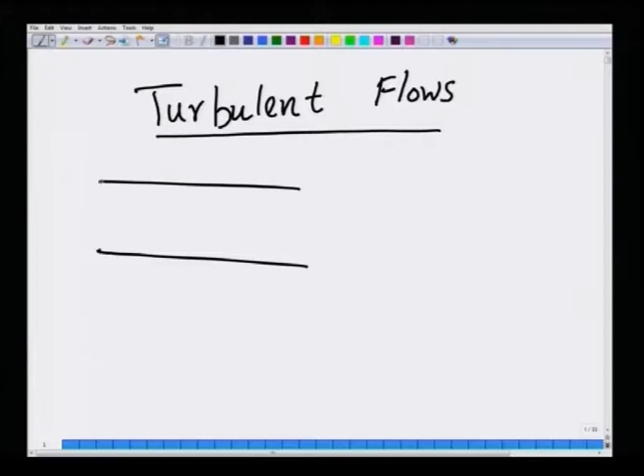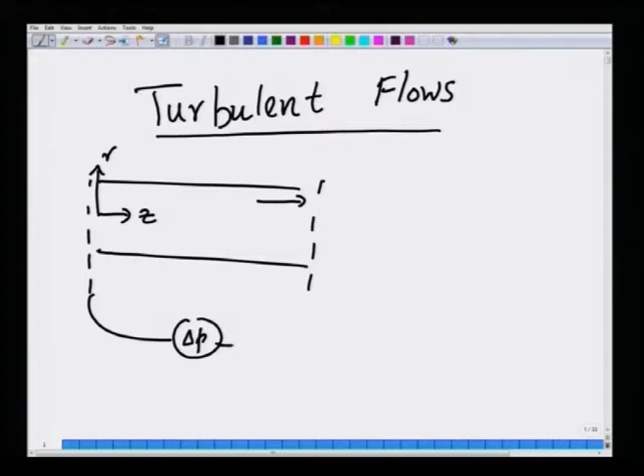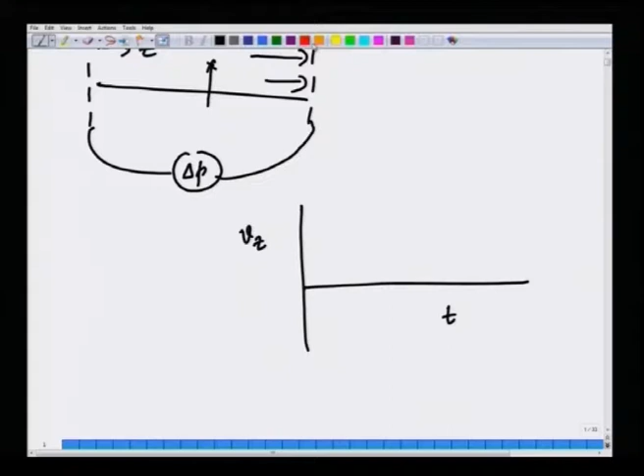We discussed in lecture 38 that turbulent flows are characterized by a large amount of fluctuations about the mean. Consider flow in a pipe, with z as the flow direction and r as the radial direction normal to the flow. While there will be mean flow if you apply a pressure drop between the ends of the pipe, there will also be a large amount of fluctuations about this mean flow. If you measure the z velocity as a function of time using a probe at a given point in the pipe, you will find a large amount of fluctuations.

About the mean, this is the z component of the velocity. On the other hand, if you measure the r component, there will again be fluctuations, but they will fluctuate about zero because there is no net flow in the r direction. The pressure gradient is only along the z direction, therefore there will be flow only along the z direction.

The fluctuations present in a turbulent flow play a very key role in determining the stresses present in the flow. We decided it is better to restrict ourselves to predicting mean quantities, such as time-averaged velocities, because from an engineering and practical perspective, what we want is actually average quantities such as friction factor, volumetric flow rate, or pressure drop. So it makes sense to restrict ourselves to predicting only the mean rather than the fluctuations.

But as we saw in the last lecture, and as I will reiterate, the fluctuations do play an indirect role even in determining the mean. The way that happens is like this.

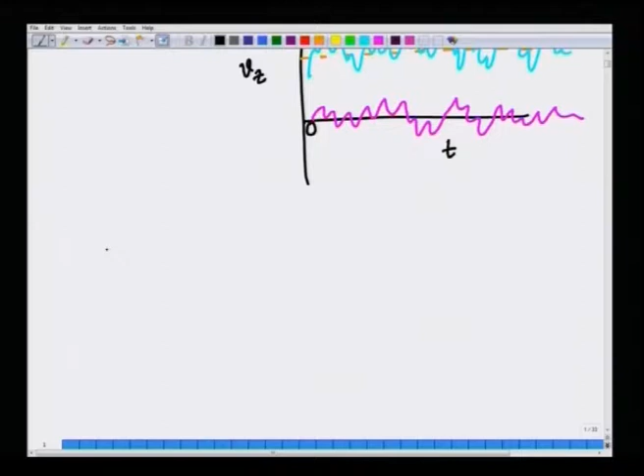You write the total velocity as a mean plus fluctuations, with fluctuations denoted by prime. The mean velocity is defined as 1 over 2T, in the limit T tending to infinity, times the integral from t minus T to t plus T of Vz of t prime dt prime.

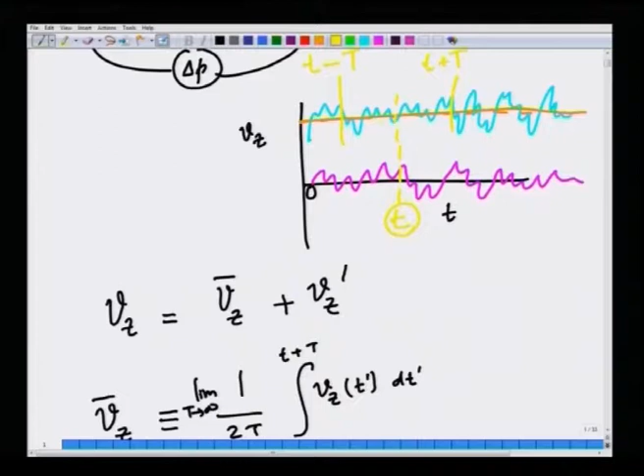What we are essentially saying is: suppose you look at this velocity profile, the actual velocity data. We take some time T, and integrate the velocity fluctuations in the region between minus T and plus T, that is t minus T to t plus T, and divide by 2T.

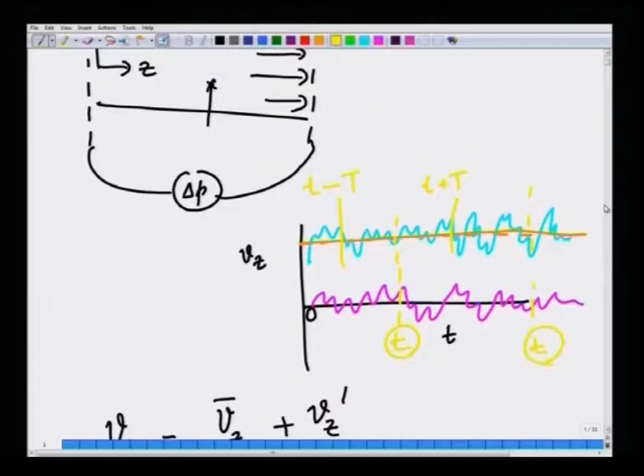Now if the flow is steady in the mean, that is if the flow is stationary, that implies Vz bar itself is independent of time. This means you could imagine doing this averaging by shifting t to some other value, doing the integral from t minus capital T to t plus capital T, and the averages thus computed will be independent of where you choose t to be. That is the meaning of stationary flows, or steady in the mean flows.

So what we did was to substitute this split: Vz as a function of x, y, z, time equals Vz bar, which is already time-averaged so it is a function only of x, y, z, plus Vz prime, which is a function of x, y, z, and time, back into the Navier-Stokes equation. And we averaged the entire Navier-Stokes equation.

While doing so, we neglected quantities like Vy prime times dVx bar by dy, averaged. This would essentially be the average of Vy prime times dVx bar by dy. Although this is non-zero, the average of a fluctuating quantity is zero. So such quantities, which occur linearly in fluctuating quantities when substituting this expansion of total flow as mean plus fluctuations back into the Navier-Stokes equation, are neglected.

You will encounter quantities like this, and those are 0, but we will also encounter quantities such as the average of the product of two fluctuations, and this is not 0. The average of the product of two fluctuations is not equal to the product of their averages, because these two quantities could be correlated in time. So when you integrate over a particular extent of time, they could in general be non-zero, even though the individual values could be 0, because if they are positively correlated, the integral could be non-zero. That is the main reason why fluctuations play a role even in determining the mean turbulent flow.

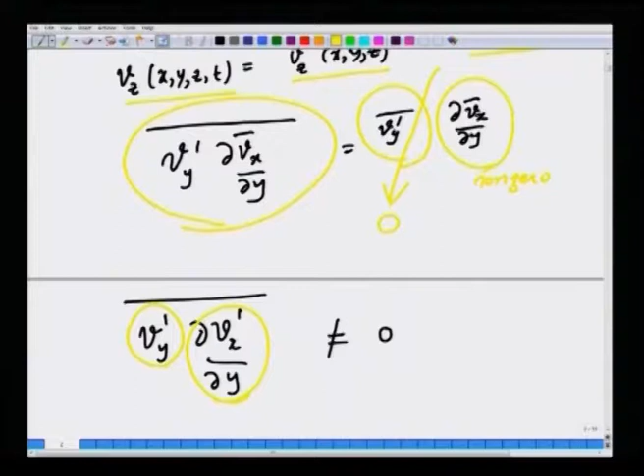So, after substituting all this and time averaging, we finally ended up with this expression: rho times Vx dVx dx plus Vy dVx dy. This is the most general expression, and we are going to simplify this a little later for specific cases. This is equal to minus partial p by partial x, plus partial tau xx bar by partial x, plus partial tau yx bar by partial y, plus partial tau zx bar by partial z. If you merely put bars in the Navier-Stokes equation, the steady Navier-Stokes equation, you will just get this, but the fluctuations play a role because there are additional quantities.

Minus d dx of rho Vx prime Vx prime bar, minus d dy of rho Vy prime Vx prime bar, minus d dz of rho Vz prime Vx prime. Now these three can be included back into the derivative: minus partial p bar by partial x, plus partial by partial x of tau xx bar minus rho Vx prime Vx prime, plus partial by partial y of tau yx bar minus rho Vy prime Vx prime, plus partial by partial z of tau zx bar minus rho Vz prime Vx prime, whole bar.

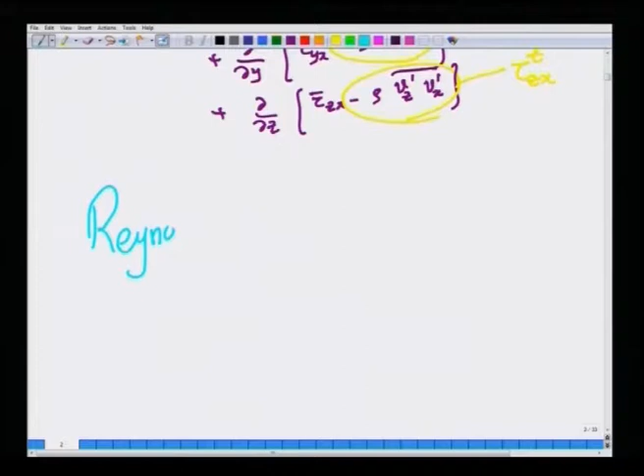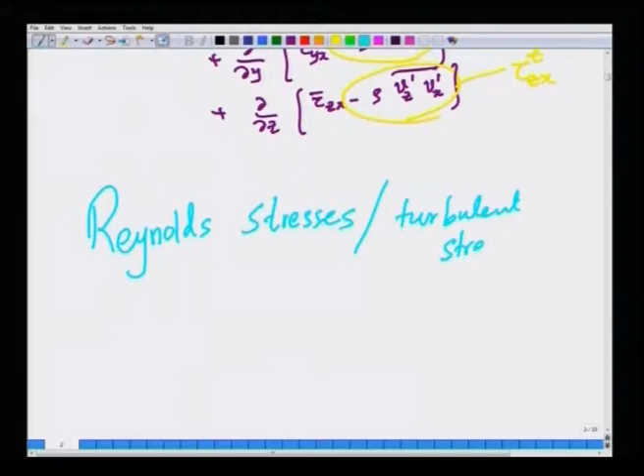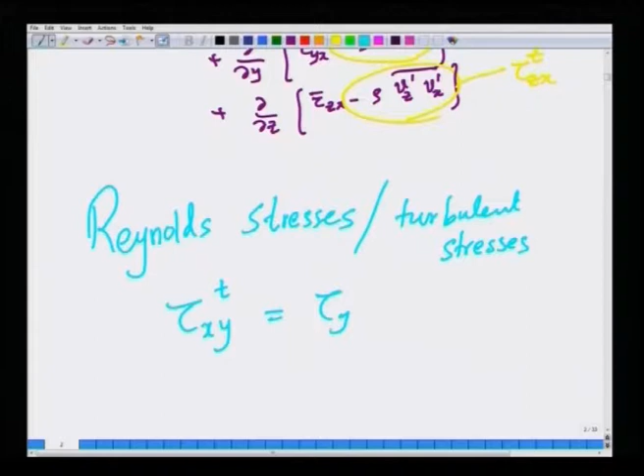Now, these are termed Reynolds stresses because they appear as stresses in the same way the viscous stresses appear, as divergence of the viscous stress. These are called turbulent stresses or Reynolds stresses. So this is denoted as tau xx turbulent, this is tau yx turbulent, and this is tau zx turbulent. They are also denoted as tau xy turbulent and so on. They are symmetric tensors, so tau xy equals tau yx, but their origin lies purely in the fluctuating motion present in a turbulent flow.

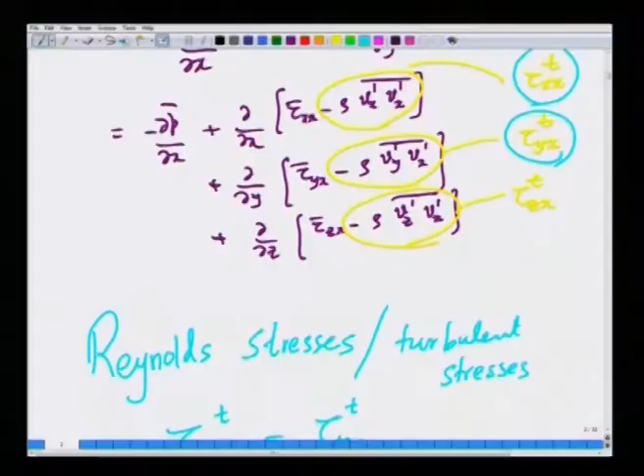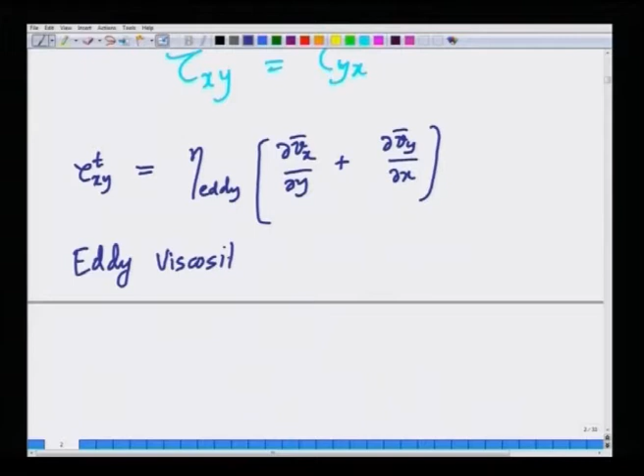So, one option is to write the turbulent stress in terms of a viscosity called eddy viscosity times the mean velocity gradients, just as we wrote for the viscous stress. This is called the eddy viscosity hypothesis. This is not a rigorous relation, this is merely a hypothesis.

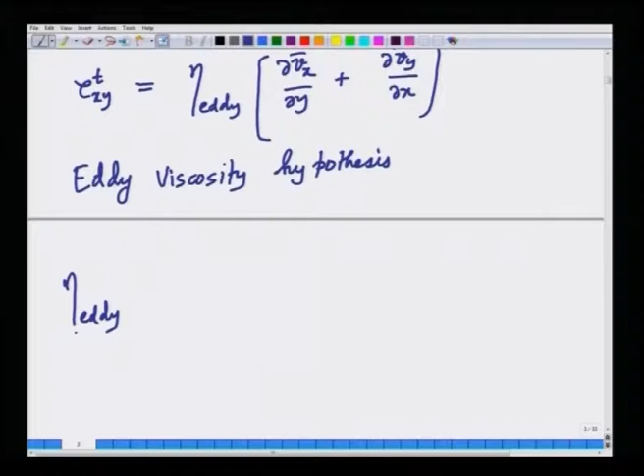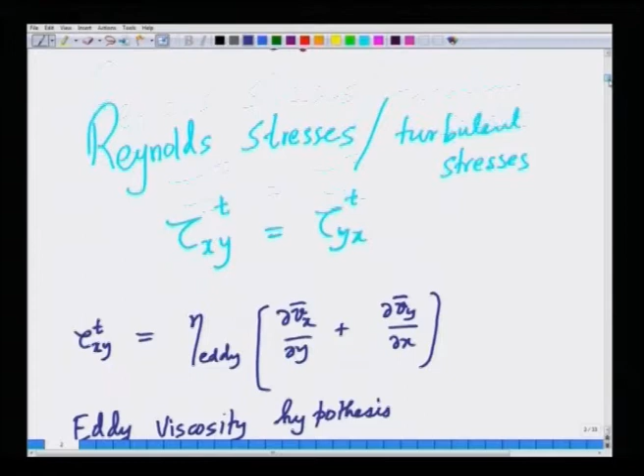Now, if the eddy viscosity, which has the same dimensions as the normal viscosity, is a constant, then it is a trivial addition, because it changes nothing. It is almost like increasing the effective viscosity by eta plus eta eddy, so it becomes another viscosity. We are merely changing the character of the fluid by increasing its viscosity by a tiny amount. But this is not what is happening in reality, because eddy viscosity is not a constant.

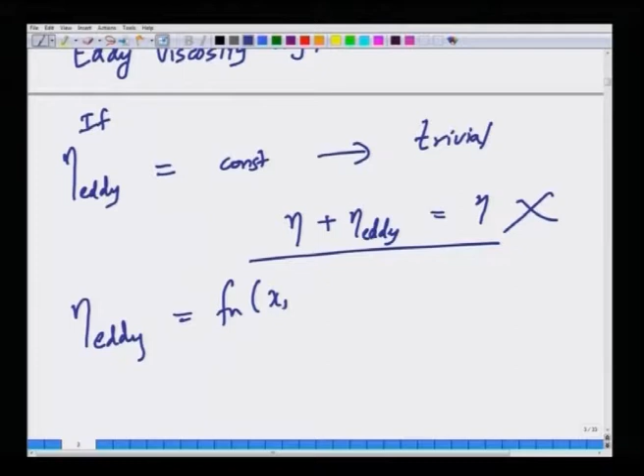It is a function of spatial position in general. For the simple reason that if you consider turbulent flow past a solid surface, like turbulent flow in a pipe, near the wall the velocities are 0 by the no-slip and no-penetration conditions. So near the wall, the velocity fluctuations are small compared to the bulk of the flow, meaning the magnitude of fluctuations is small there. Hence the turbulent stresses will be small, and since we are modeling turbulent stress in terms of mean velocity gradients, the eddy viscosity must somehow be small to keep the turbulent stresses small close to the solid surface.

That physical aspect has to be built into the model by saying that eddy viscosity is not a constant, but instead it is a function of spatial position.

So in some sense, what we are trying to do in this type of hypothesis or modeling is that our ignorance about the way turbulence transports momentum is buried in this single parameter. One can ask whether a single parameter, well, it is not a single constant but a function, can alone describe all the complexities of turbulence.

That is a fair criticism, but nonetheless for engineering applications we will show that eddy viscosity proves a very reasonable tool to predict, for example, the friction factor versus Reynolds number relation in the turbulent regime. With some suitable physically motivated approximations and some experimental input, we will show a little later how we predict using this model.

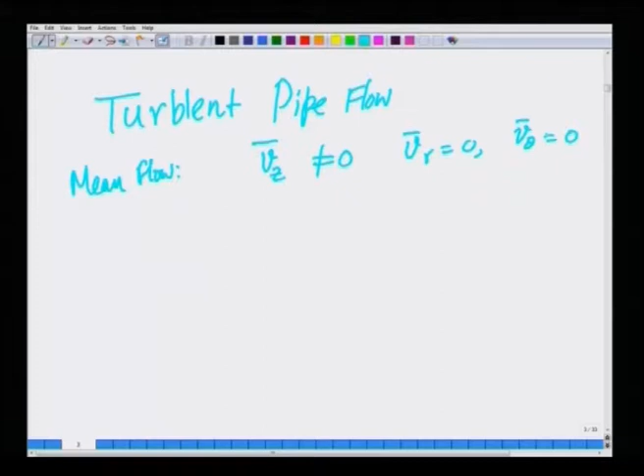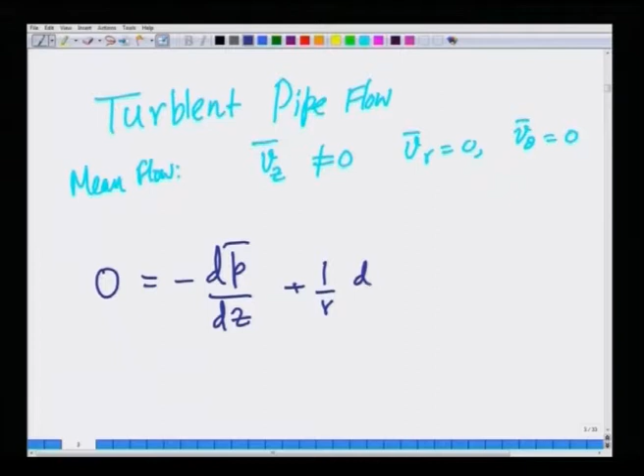Now, of course, turbulent flow in a pipe must be addressed in cylindrical coordinates, so I will switch to cylindrical coordinates. The mean flow will satisfy, there is only one mean flow V z, so V r is 0 and V theta is 0, and many terms will drop out. So the mean flow z momentum equation is plus 1 over r, d/dr of r d tau rz by dr.

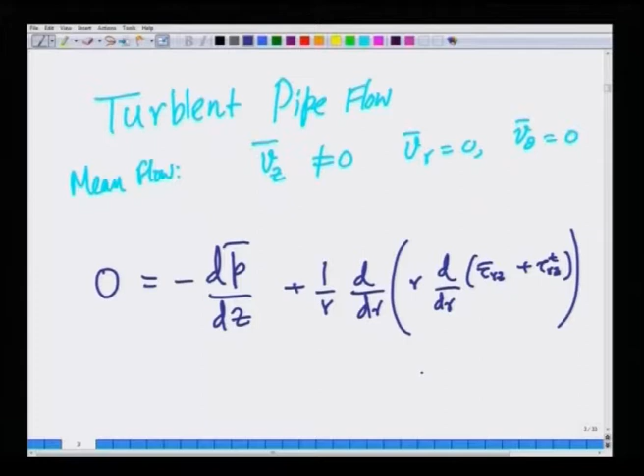But we also have not just this, we also have the turbulent contribution. So let us write this as: there are both the mean viscous contribution plus the turbulent contribution. So in some sense we can rewrite this very simply to yield tau rz plus tau rz turbulent.

This is equal to dp/dz. And then we take r here and integrate, you will get tau rz plus tau rz turbulent equals dp/dz times r squared by 2. So this is d/dr of r, and you will have an r after integration, plus some constant. So tau rz bar plus tau rz turbulent is dp/dz times r/2 plus C1/r.

Now we can readily say that as r goes to 0 at the center of the pipe, the stresses will be finite, so C1 has to go to 0. So we can say very easily that tau rz plus tau rz turbulent is r/2 times dp/dz.

Now if we do a macroscopic momentum balance, take a tiny section of the pipe delta z and do a macroscopic momentum balance, the forces here are the pressure forces on this side and this side. If you take this as the control volume, on the surface you will have viscous forces which will retard the fluid in the minus z direction.

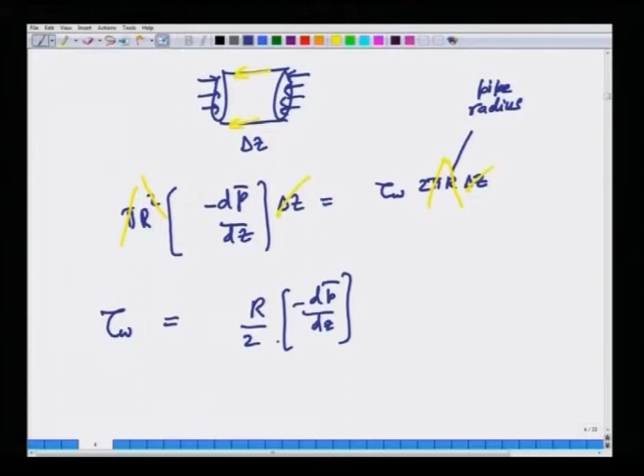So we substitute instead of dp/dz. This implies minus dp/dz is 2 tau w by r. We substitute this term out to get tau rz plus tau rz turbulent is minus r by R times tau w, because that is what it is. You have plus dp/dz here and minus dp/dz there, so if you substitute in terms of tau w, the wall shear stress, you will get simply minus r, the factors of 2 will go away.

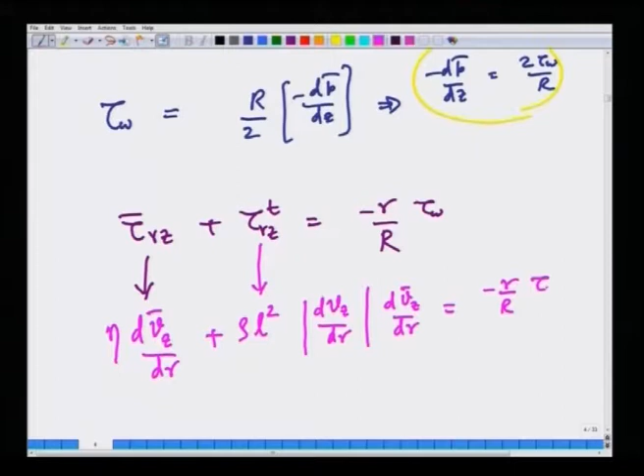Now we know what tau rz is: eta times dVz/dr, and we know what the turbulent stress in the rz direction is from the mixing length model: it is rho L squared times dVz/dr times dVz/dr. This is equal to minus r by R times tau w, the wall shear stress exerted by the wall on the fluid.

Now, so you have a pipe, the axis is along the center of the pipe. We said that r is along this direction, z is along this direction. Now I am going to define y from the wall towards the center. So trivially, capital R minus small r is equal to y. This implies dy is minus dr. So once I use this, I can convert this entire equation in terms of y.

Which I will do very quickly. So you will have rho L squared times dVz/dy whole squared, plus eta dVz/dy, minus 1 minus y by R times tau w, is 0.

Notice that y is going like this and the velocity profile will be like this. So, dv z dy is a quantity that is positive, and that has been taken into account in R. So, the mod is not required anymore, because dv z dy is positive.

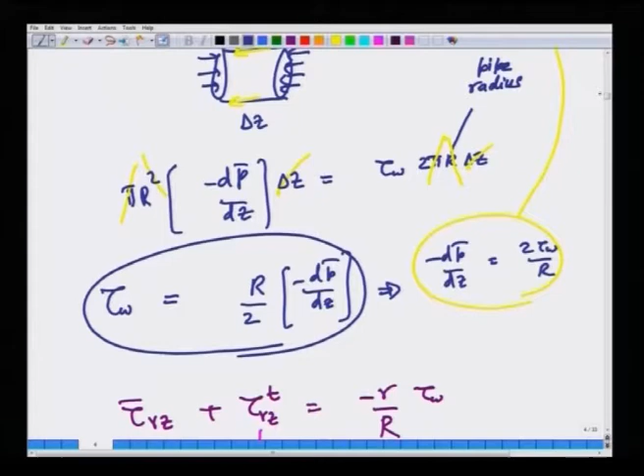But we know what is tau w in terms of the macroscopic momentum balance. Tau w is r by 2 delta p by L. That is something that we just derived using a macroscopic momentum balance here. So in this expression, instead of dp dz, I am going to write minus delta p by L.

Delta p is nothing but p inlet minus p outlet, that is the definition of delta p. So u star therefore becomes square root of r by 2 delta p by L times 1 over rho within the square root.

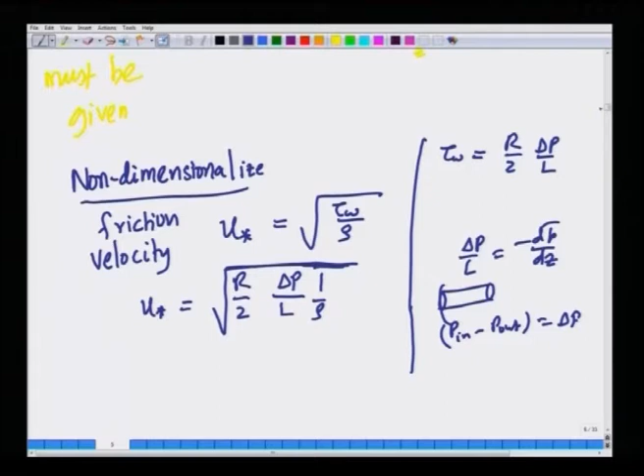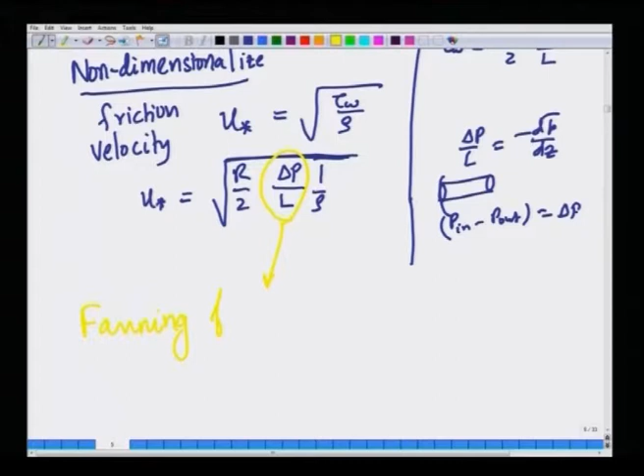Now we know that delta p by L is related to friction factor for flow in a pipe. Here I am going to use the fanning friction factor, which differs by a factor of 4 from the Darcy friction factor, which we have already pointed out the differences. Fanning friction factor is defined as delta p divided by 2 rho v squared, times d by L, equal to F. This is the fanning friction factor.

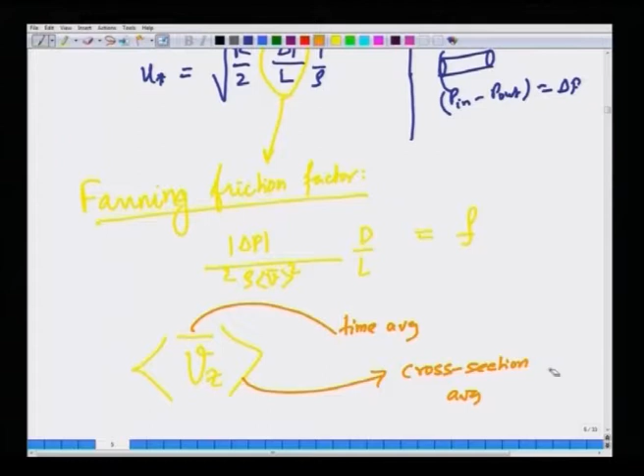Now there are two types of averages that are involved. Suppose I have a quantity V z, the over bar denotes time average, the angular brackets denote cross sectional average. When we define friction factors, we have to define with respect to a cross sectional average velocity, but here we are considering turbulent flow. The velocity is also time dependent in general, but we are worried only about the time independent mean flow. So there is an average with respect to space as well as a time period, the extent of time.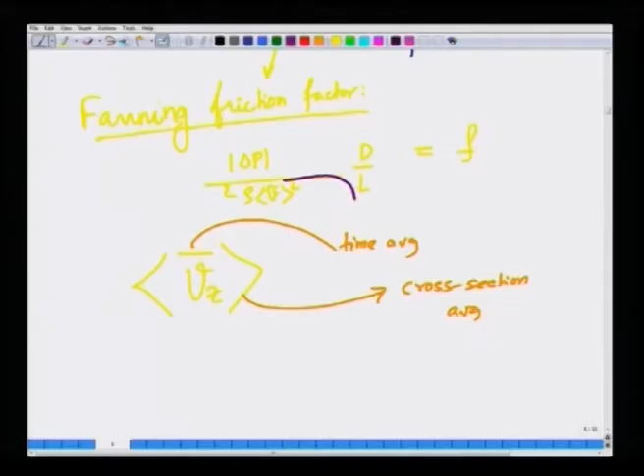Using this I can write what is delta p by L in terms of F, and substitute it back here. So I will get u star, the scale used for non dimensionalization, is nothing but square root of delta p by L, d by 4, 1 over rho. But delta p by L times d by 2 rho is F times v squared. So delta p by L d by 4 rho is nothing but F by 2 v z squared.

So if you substitute this in here, you will get u star is v z average times square root of F by 2. So this is a highly non trivial velocity scale. This is called the friction velocity, because normally we would non dimensionalize things only by v z average. Here we are trying to multiply it by square root of F over 2. So it is highly non trivial in terms of non dimensionalizing turbulent flow.

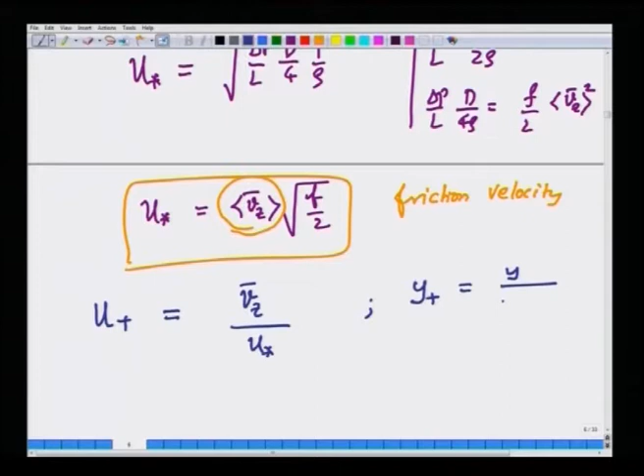So we will define the non dimensional z velocity as v z bar by u star, and we will define non dimensional distance y plus as y by nu by u star, where nu is eta by rho, the kinematic viscosity.

So, since we have used the length scale for non-dimensionalization, this is not the radius of the tube, and there is a very important reason why we are choosing a different length scale. This length scale is not set by the macroscopic dimensions of the geometry such as pipe radius, channel width, or length of a plate.

It is inherent to the turbulent flow, because nu is the kinematic viscosity and u star is essentially the friction velocity, dictated by the turbulent flow.

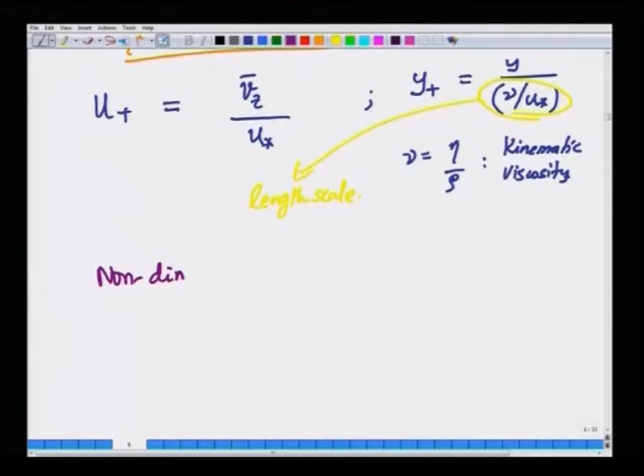That also has to be non-dimensionalized, all the length scales, by nu divided by u star. So, L plus is L divided by nu by u star.

So, after doing all this, we can rewrite this expression in terms of the non-dimensional variables we have just defined. So, we will write this as L plus squared times du plus by dy plus whole squared, plus du plus by dy plus, minus 1 minus y plus by r plus, equal to 0.

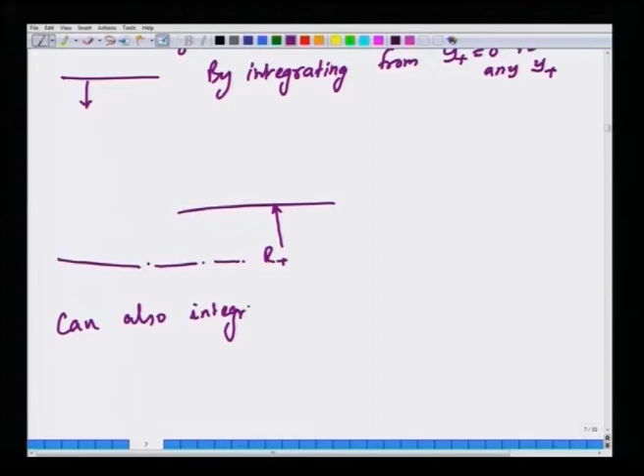Now, this is by integrating from the wall towards the center, from y plus equal to 0 to any y plus. Another way of integrating, which is also often useful, is to integrate from the center line, that is from r plus towards the wall, from y plus is r plus to any y plus.

Once we do that, we will get u plus is u plus max plus the integral from y plus to r plus of 1 minus square root of 1 plus 4 L plus squared times 1 minus y plus by r plus, divided by 2 L plus squared, dy plus. So this is also possible, and we will find use for both these expressions in our discussion to follow.

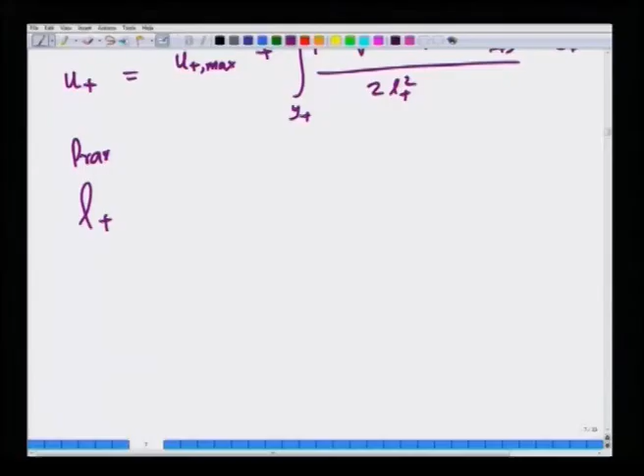Now, Prandtl proposed for the mixing length a hypothesis. See, the mixing length has to go to 0 at the wall, so the simplest hypothesis is that it is some constant k times y plus, a linear function of y plus. Experimentally it turns out that k works out to be 0.4 to predict the friction factor - we will come to that a little later - but right now we will just treat k to be a constant, which can be fitted by comparing with experiments.

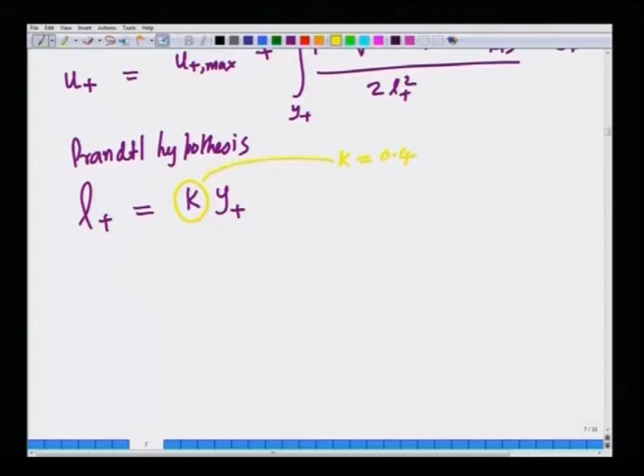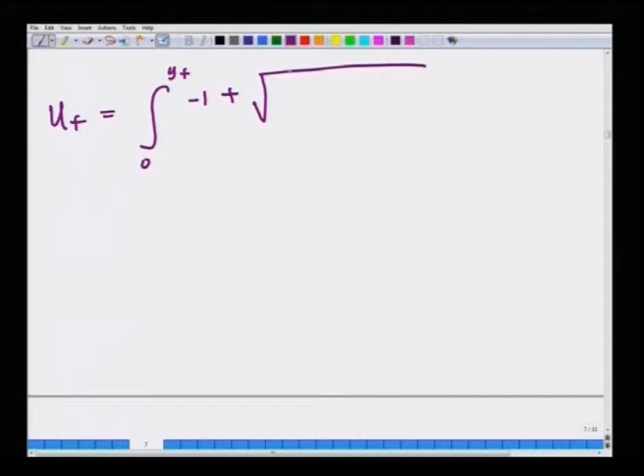Once we do that, let us rewrite this expression again and make an important observation. So what we are going to do is use this expression where we had u plus as the integral from 0 to y plus of minus 1 plus square root of 1 plus 4 L plus squared times 1 minus y plus by r plus, divided by 2 L plus squared, times dy plus. We are going to use this expression to analyze and draw some very important conclusions about turbulent flow past solid surfaces. The first thing is universality.

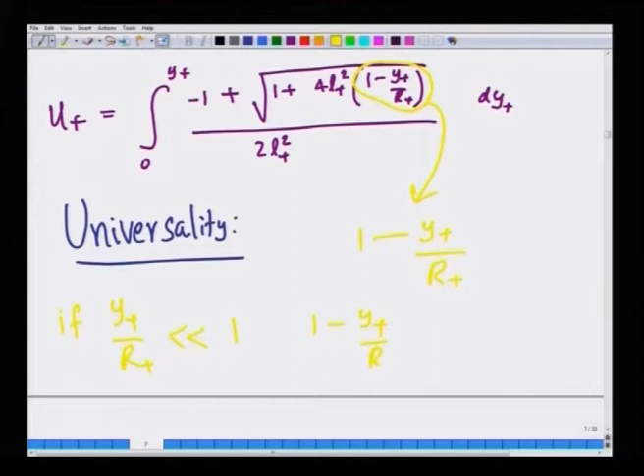Now, if you look at this expression, the only way in which radius enters the problem is through this term, 1 minus y plus by r plus. If y plus by r plus is small compared to 1, that is if you are fairly close to the wall, then we can treat 1 minus y plus by r plus as approximately 1, and therefore all the dependence on the radius of the pipe disappears from the problem.

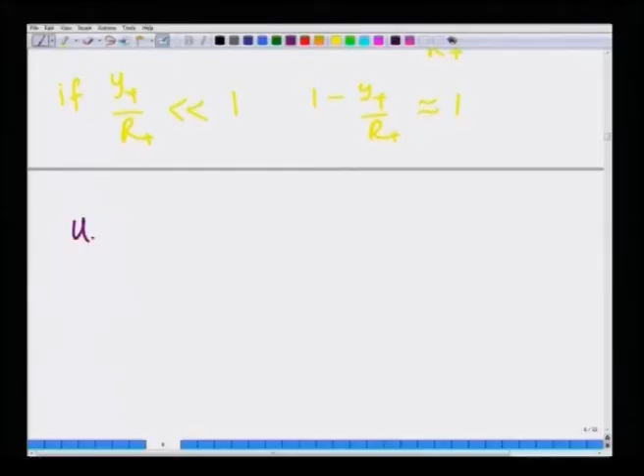So, essentially you have u plus as a function of y plus, approximately under this condition that y plus by r plus is small compared to 1, this is approximately equal to minus 1 plus square root of 1 plus 4 L plus squared, divided by 2 L plus squared, times dy plus. Or you can simplify this further.

We can write root of 1 plus 4 L plus squared minus 1 as follows: consider root of 1 plus 4 L plus squared minus 1, times root of 1 plus 4 L plus squared plus 1, divided by root of 1 plus 4 L plus squared plus 1. I am multiplying and dividing by the same quantity. If I multiply these two terms, I get 1 plus 4 L plus squared minus 1, divided by square root of 1 plus 4 L plus squared plus 1. Now, the two minus 1's cancel to give you 4 L plus squared by square root of 1 plus 4 L plus squared plus 1.

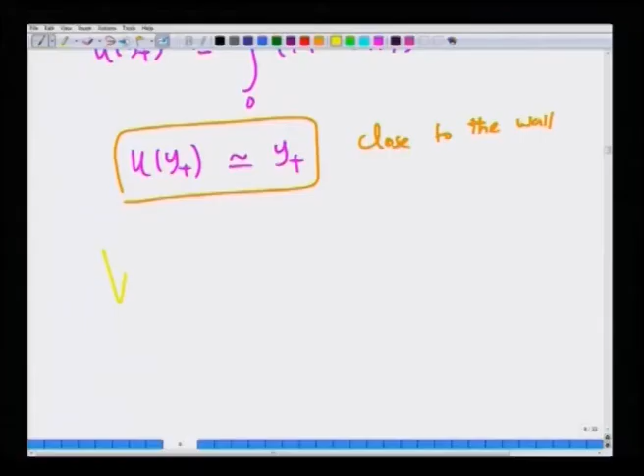Sometimes the term laminar sublayer is used, but the flow is of course not laminar in this region—it is in fact turbulent, but viscous effects dominate the turbulent stresses very close to the wall. This is a very universal feature of any turbulent shear flow past a solid surface, not restricted to turbulent flow in a pipe.

So let us look at the turbulent core, that is in the center of the pipe. Can we say anything more general? We are far away from the wall, so L plus is large compared to 1, because L plus is k y plus, and y plus is large compared to 10. But still we are saying y plus is less than r plus.

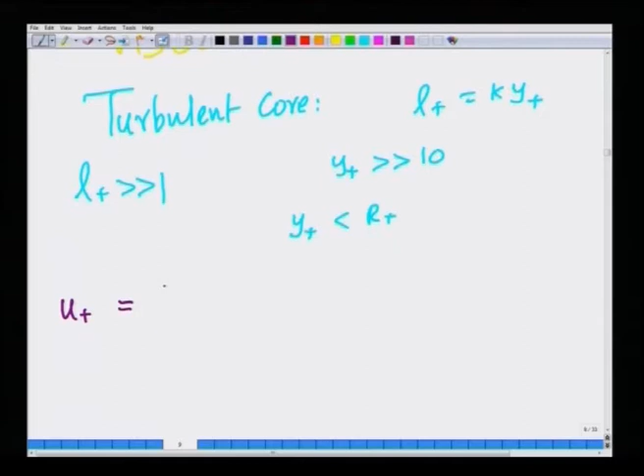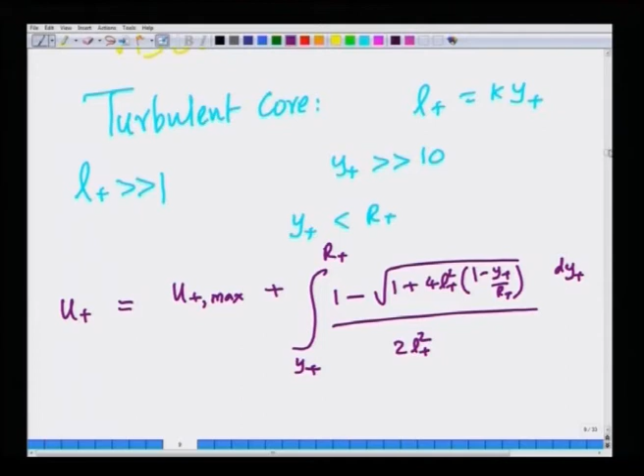Remember the other expression we had for u plus, by integrating from the center of the pipe: u plus max plus the integral from y plus to r plus of 1 minus square root of 1 plus 4 L plus squared times 1 minus y plus by r plus, dy plus, divided by 2 L plus squared. Now if L plus is large compared to 1, we can say this expression is approximately equal to 2 L plus times 1 minus y plus by r plus to the half.

If L plus is large compared to 1, then we can say this is approximately just equal to that. So we can further write u plus as u plus max minus the integral from y plus to r plus of 1 minus y plus by r plus to the power half, dy plus, divided by L plus.

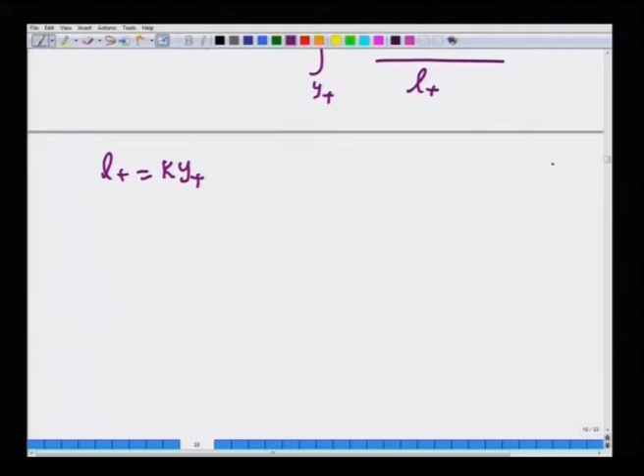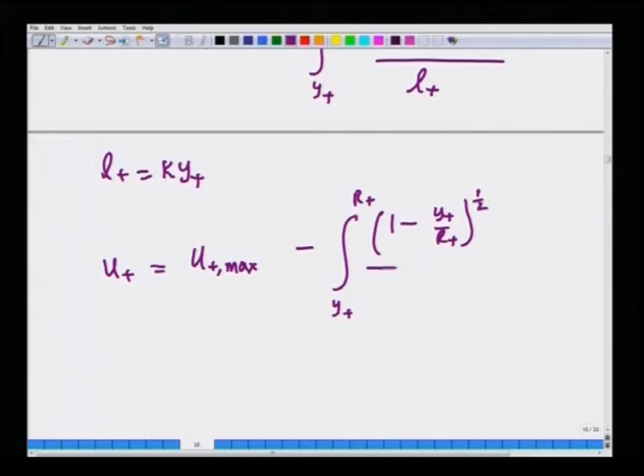Now L plus is k y plus—this is Prandtl's hypothesis for the mixing length being a function of the distance from the wall. So u plus is u plus max minus the integral from y plus to r plus of 1 minus y plus by r plus to the power half, divided by k y plus, dy plus. All we are saying is that when L plus is large compared to 1, we are expanding this term—that is the only simplification we are making.

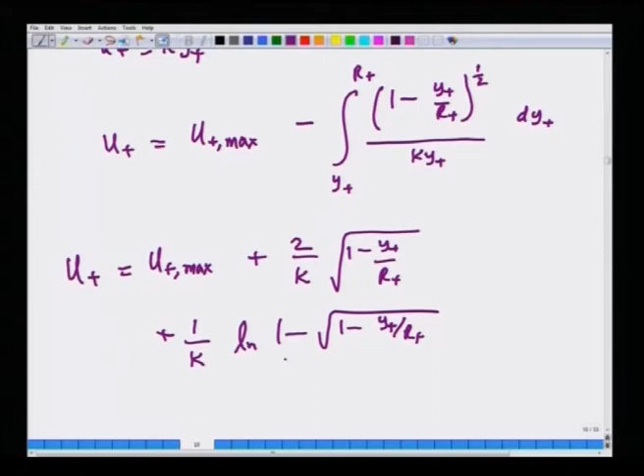If you look at this expression, you can integrate this: u plus is u plus max plus 2 over k times the square root of 1 minus y plus by r plus, plus 1 over k times the logarithm of 1 minus square root of 1 minus y plus by r plus, divided by 1 plus square root of 1 minus y plus by r plus.

Now here there are only two constants floating around, u plus max and k. k should be independent of flow conditions because we have shown that it is the mixing length, so it should not be a function of the flow. It could be a function of geometry—for example this is pipe flow—but generally it should not be a function of flow conditions. But u plus max is a function of flow conditions, because that is the maximum flow velocity of the pipe, but in a non-dimensional sense.

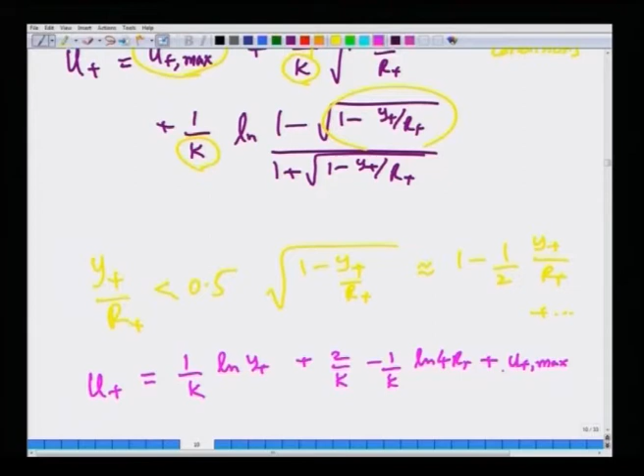Suppose y plus by r plus is less than 0.5, you can expand the square roots: square root of 1 minus y plus by r plus is approximately 1 minus half y plus by r plus, and so on. Substituting this back, you get u plus is 1 over k ln y plus, plus 2 over k minus 1 over k ln of 4 r plus u plus max, plus order of y plus by r plus. So we are not close to the center line, but at the same time we are far away from the wall—this is called the turbulent core region.

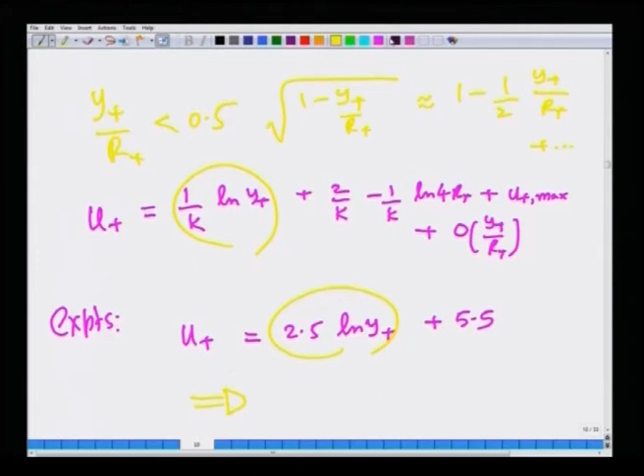And experiments tell you that u plus is 2.5 ln y plus plus 5.5. So by comparing these two expressions, we can infer that k is 0.4, and u plus max is 2.5 logarithm of Re root f plus 1.37. So this is the description we have for the flow that is far away from the wall, but still not close to the center—a little away from the center. This is called the turbulent core region.

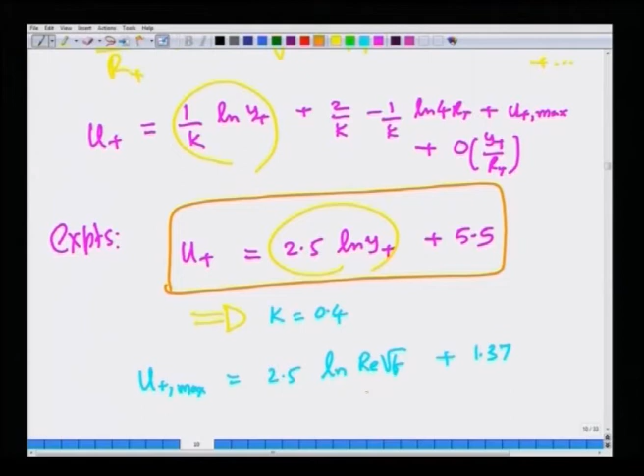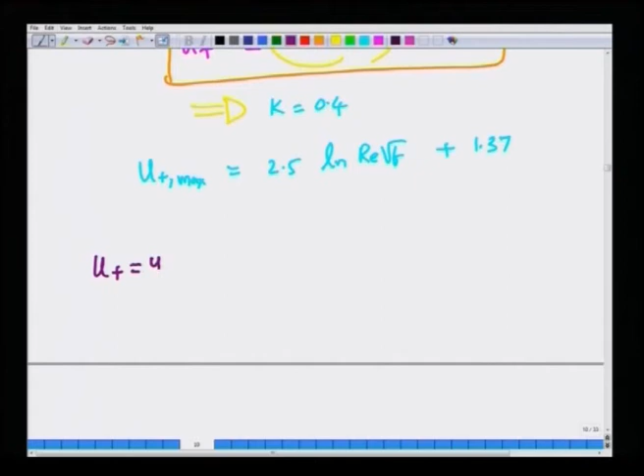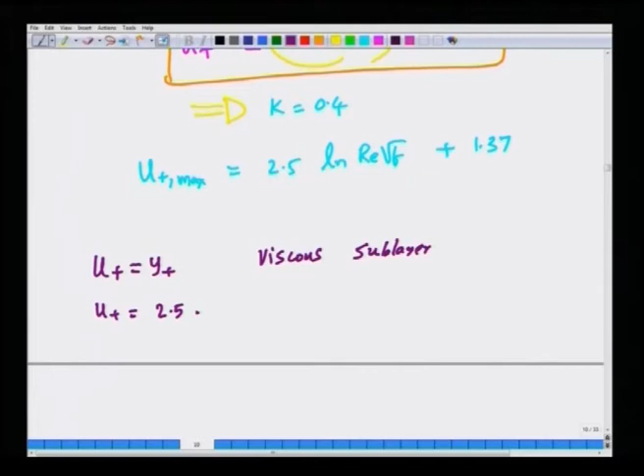So we have a description for very close to the wall—the viscous sublayer, where the velocity profile is just proportional to y plus—and then we have a logarithmic velocity profile far away from the wall. So we can patch these two relations: u plus equals y plus in the viscous sublayer, and u plus equals 2.5 log y plus plus 5.5 in the turbulent core.

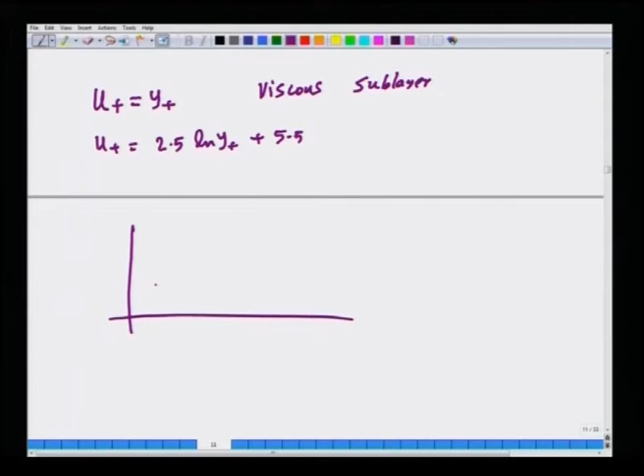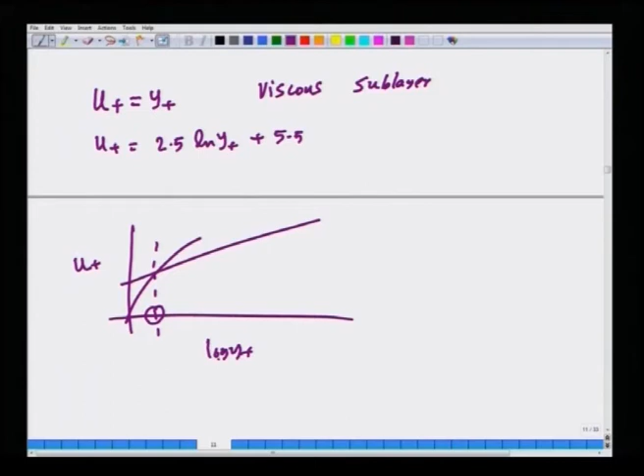Now, if you plot these two curves and say that the region where they meet is the thickness of the viscous sublayer, you will have u plus as a function of log y plus, with one asymptote like this and another asymptote like this. If you equate these two and call this the viscous sublayer thickness, you find delta VS plus equals 2.5 logarithm of delta VS plus, plus 5.5.

If you solve this, you get delta VS plus equals 11.6. So the non-dimensional viscous sublayer thickness is 11.6 in general.

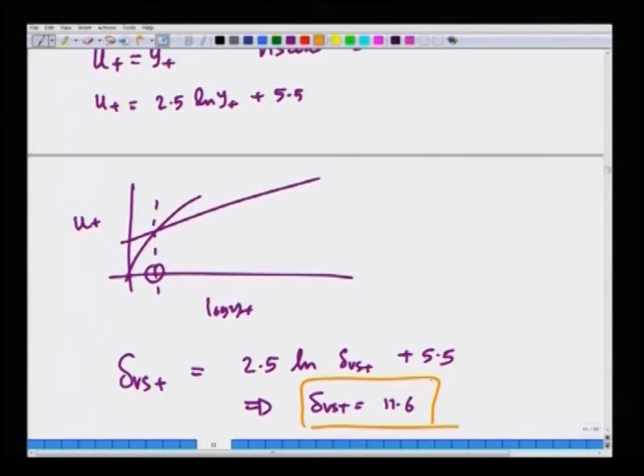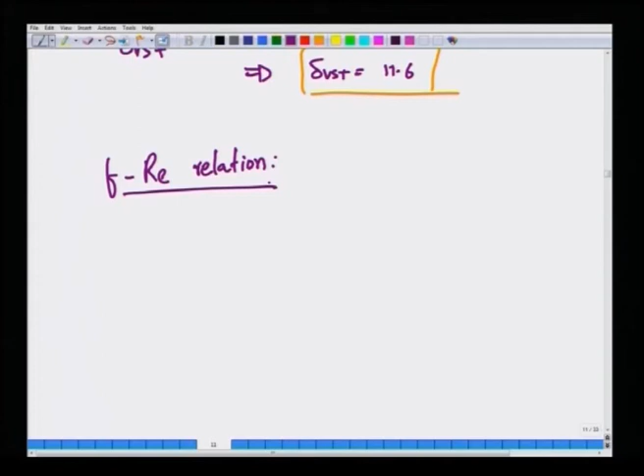Now we have all the required quantities to find the friction factor versus Reynolds number relation. You know that u star is square root of f by 2 times Vz, which is nothing but square root of f by 2. The definition of Vz is 1 over pi r squared, integral from 0 to R of 2 pi r times the time-averaged velocity Vz bar dr, and this relates to u star.

We know that u plus is Vz by u star. Since u star is a constant, I can bring it to the denominator and call it u plus, and get a relation for the friction factor: 2 by root f equals 2 by r squared, integral from 0 to R of u plus dr.

Now I am going to convert from r to y. So this becomes 2 by r squared, integral from 0 to R of (capital R minus y) times u plus dy.

Now, we know that u plus has a composite description. Close to the solid surface you have the viscous sublayer, and a little away you have the logarithmic region. But as a first approximation, if you use u plus equals 2.5 log y plus plus 5.5 across the entire pipe, we are not accounting for the viscous sublayer or the velocity profile near the center, since the logarithmic profile is valid only in the intermediate regime, away from the wall but also away from the center. We are not going as far as the center of the pipe, but as a first approximation let's see what happens if we just use this.